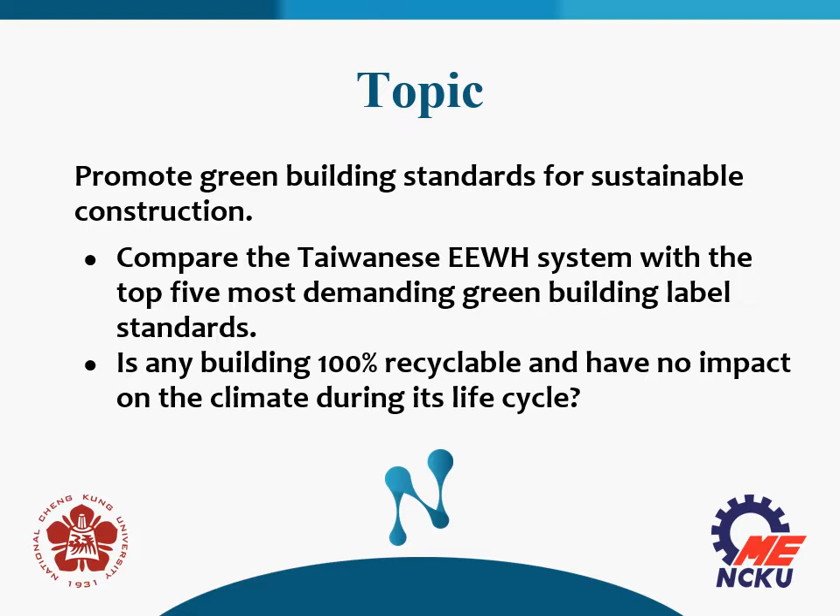This is the outline. Many may consider a green building as a building that comes with green walls and solar panels to beautify and protect the environment. It is way more than that. Green building is a multidisciplinary subject and has a profound impact on us.

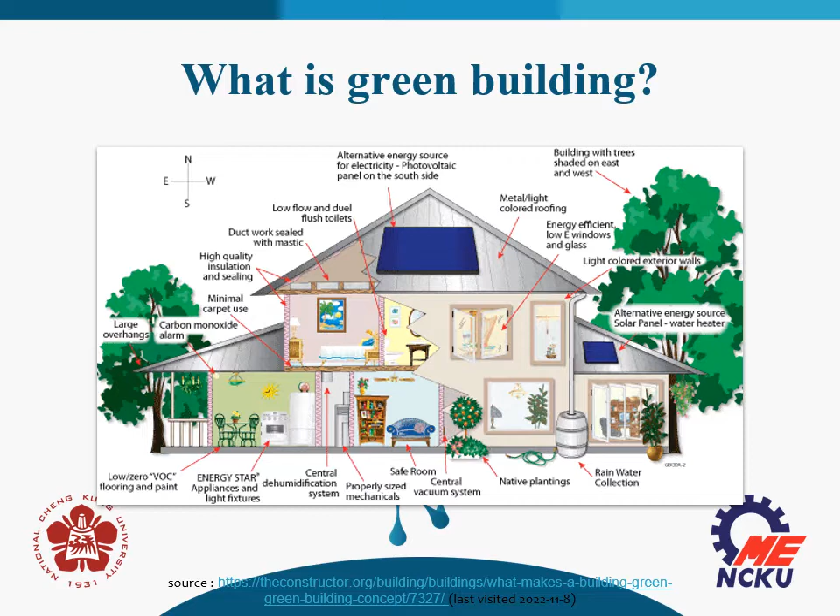Generally speaking, green building reduces the environmental impact of buildings and enhances the health and well-being of building occupants. In order to meet global carbon reduction goals, we need a rapid and far-reaching sustainable transition in land, energy, buildings, transport, and cities. Green buildings are designed to reduce the overall impact of the built environment on human health and the natural environment by efficiently using energy, water, and other resources, protecting occupant health and improving employee productivity, reducing waste, pollution, and environmental degradation.

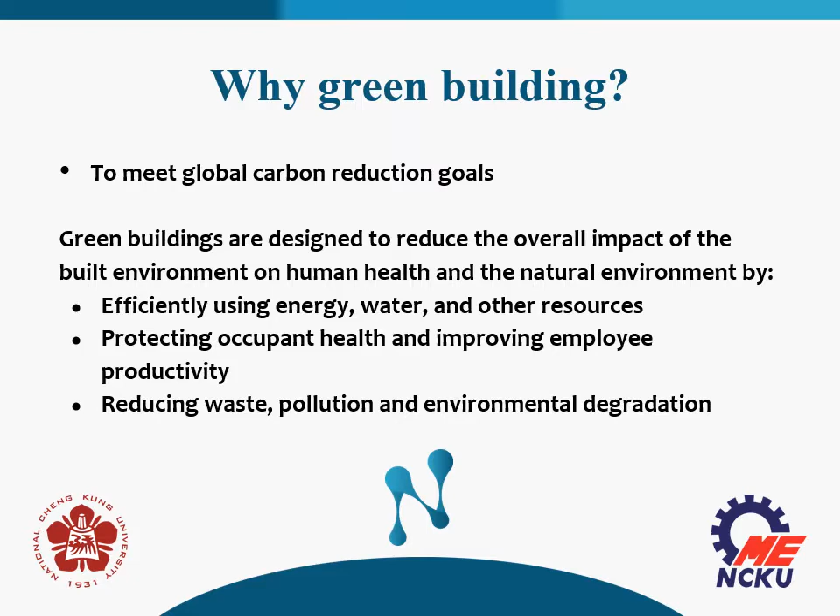Let's start watching the video about exploring green building and the future of construction.

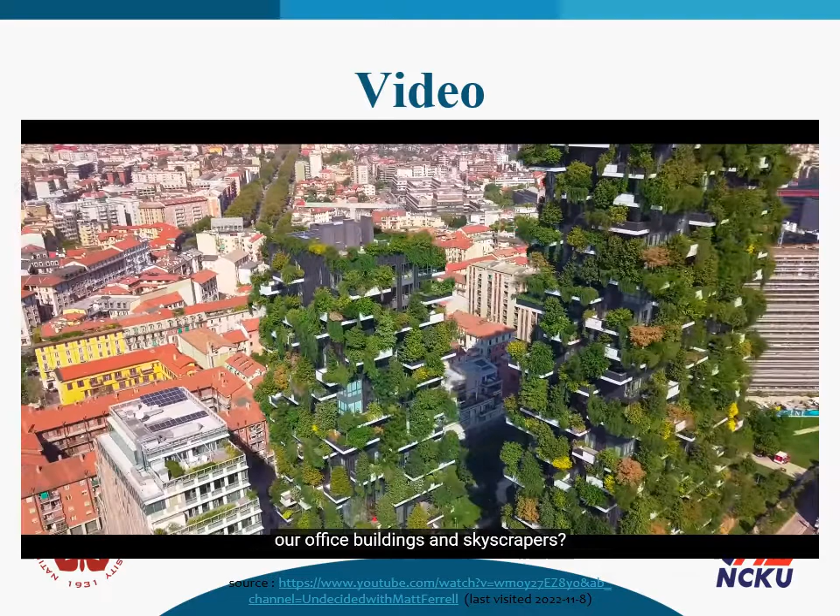A lot of focus is put on generating cleaner energy for a sustainable future, but that's just one piece of the puzzle. What if we could dramatically reduce our energy consumption just by changing the way we build our office buildings and skyscrapers? Imagine a skyscraper with smart windows and walls made from fungus. Yes, fungus. Let's explore green building and the future of construction. And can going net zero really make a difference? I'm Matt Ferrell. Welcome to Undecided.

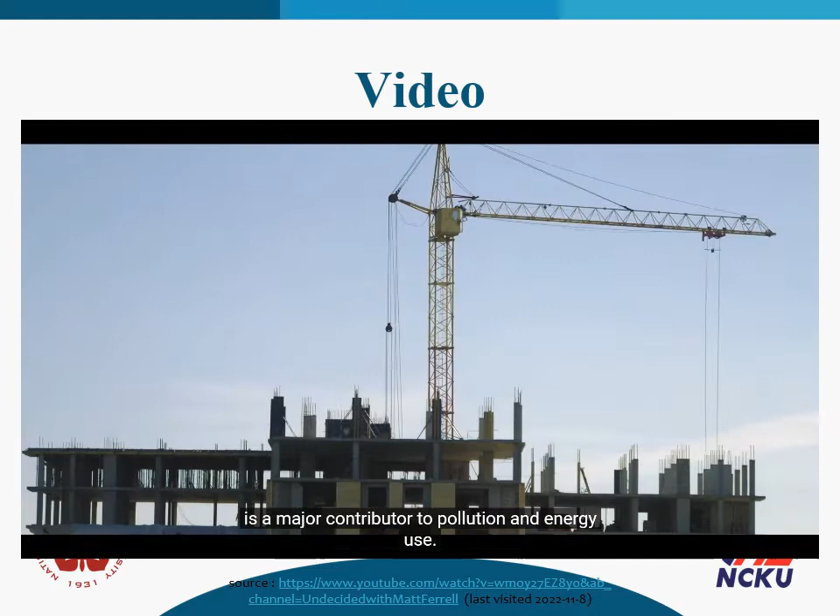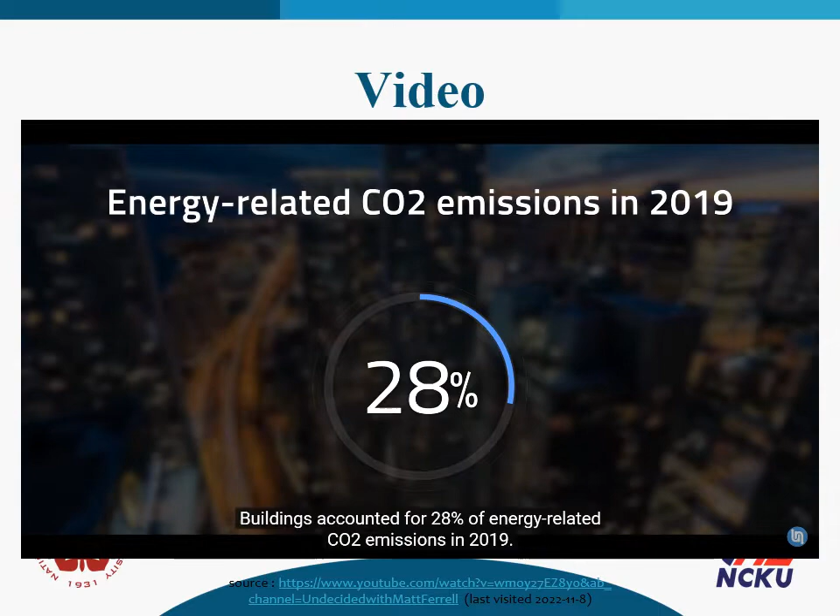Building office buildings and skyscrapers with thousands of pounds of concrete, steel, and other materials is a major contributor to pollution and energy use. But it's more than that. Our homes and office buildings' lighting, heating and cooling, poor insulation, and integration into the surrounding environment have a lasting impact on energy use and costs. They require larger amounts of power and water to keep comfortable, which just keeps going on indefinitely. Buildings accounted for 28% of energy-related CO2 emissions in 2019. In order to reduce that problem, we need some innovations around how we build our houses, offices, and skyscrapers.

And this is where net zero and green buildings come in. These constructions are designed and built with the goal of creating a positive impact on the environment and climate. They can combine energy efficiency and renewable energy to reduce power consumption, benefit the environment, and improve the quality of life for the people that live and work in those buildings. Now, the concept of green building has been scaling from small houses to big offices and skyscrapers around the globe. Some international certifications have been developed in order to provide clear guidelines on how to do it.

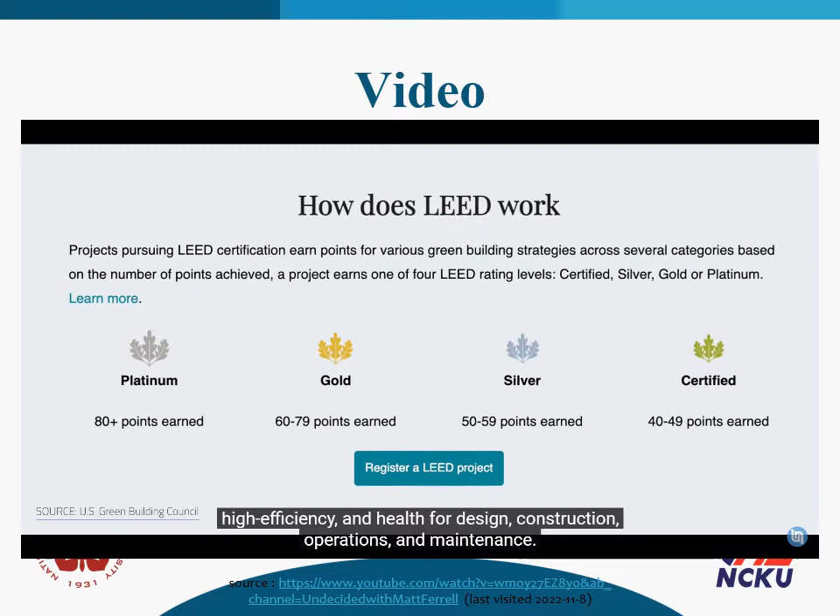The U.S. Green Building Council developed the Leadership in Energy and Environmental Design, also known as LEED, to rate green buildings and provide owners with a framework for cost saving, high efficiency, and health for design, construction, operations, and maintenance. Another popular certification is the Building Research Establishment Environmental Assessment Method from the UK, also known as BREEAM. Or BREEAM? Who comes up with these acronyms?

Well, anyway, zero energy buildings have on-site renewable power sources like solar panels to try to produce as much clean energy as it consumes. You can't always do 100%, but the goal is to get as much as you can. Now, the power generated during the daytime is consumed by the facility itself. And if there's energy surplus, the building delivers that into the grid to try to compensate for grid energy consumption at night. However, to improve efficiency, energy consumption needs to be reduced.

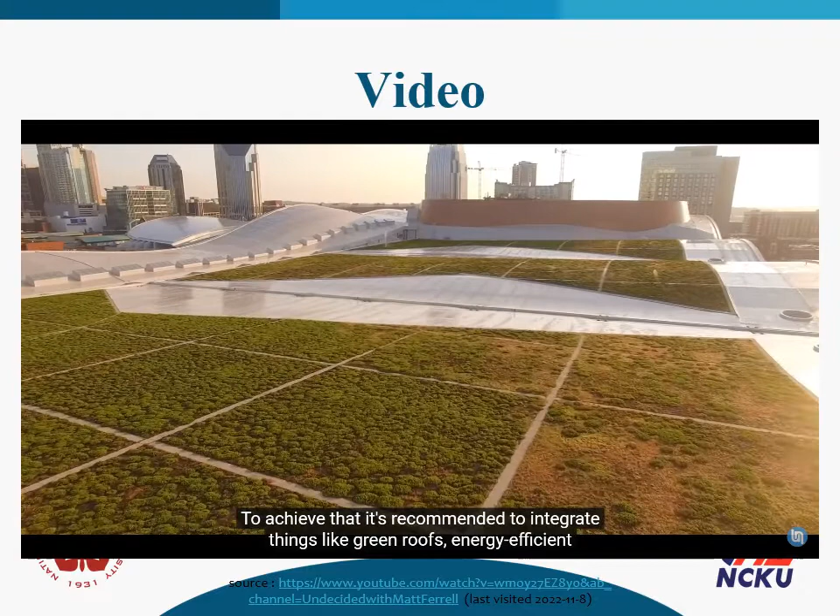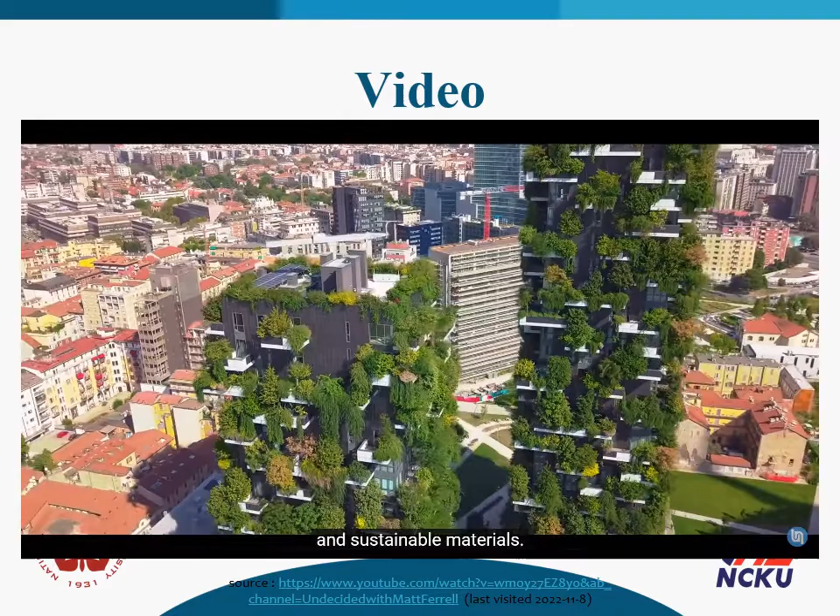So heating and cooling and lighting needs to be minimized. To achieve that, it's recommended to integrate things like green roofs, energy efficient windows with triple pane glass, and good insulation. Now, net zero buildings are also considered green if they're constructed with non-toxic, eco-friendly, and sustainable materials. They should also use less water and have good air quality so it becomes more sustainable.

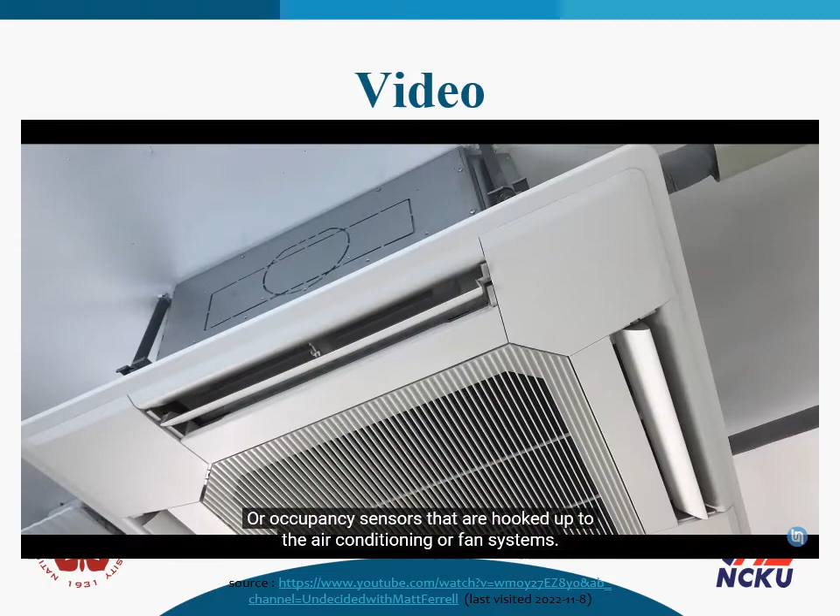Some of the simplest solutions you may have already seen where you work. A good start to making a building more efficient is using high efficiency LED and smart lighting, or occupancy sensors that are hooked up to air conditioning or fan systems. All of those can contribute considerably to reduce energy consumption.

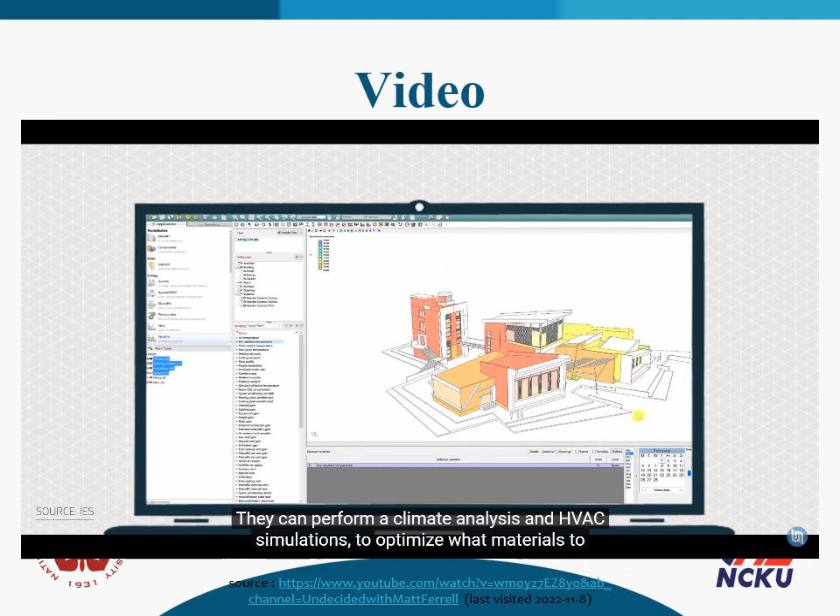But taking things to the next level, engineers and architects can perform advanced analysis through 3D building energy simulation tools to achieve higher efficiencies. Some software like Green Building Studio, Energy Plus, and IES Energy Modeling enable engineers and architects to improve a green building's design in order to increase their sustainability. They can perform a climate analysis and HVAC simulations to optimize what materials to use and how to orient the building for best efficiency. They can see exactly how the building will fare throughout the year before it's even built.

Examples of green and net zero buildings have been spreading worldwide over the past decade. In London, for example, Siemens has built the Crystal, one of the greenest buildings in the world. This highly sustainable building is also a unique events venue.

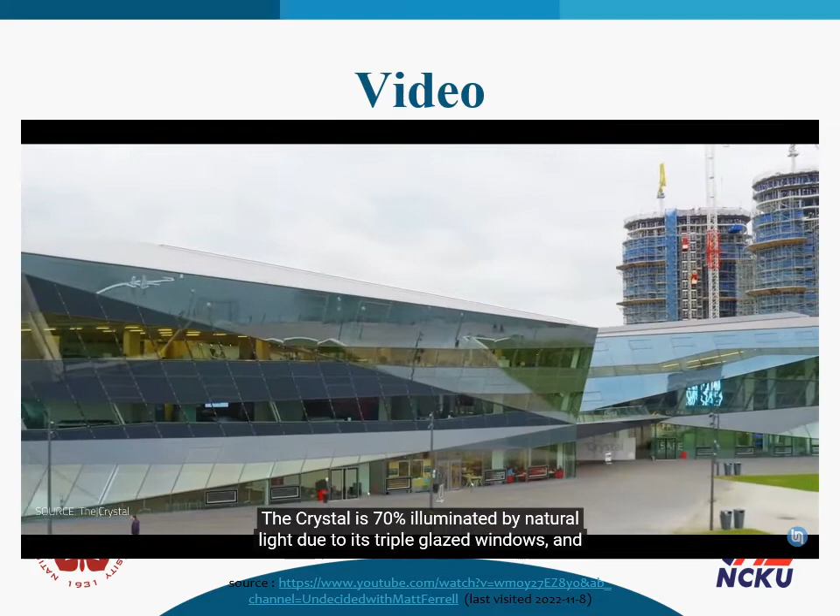It establishes the benchmark for sustainable building design, achieving Platinum LEED and Outstanding BREEAM accreditation, the most rigorous standards for sustainable design. The Crystal is 70% illuminated by natural light due to its triple glazed windows, and the solar panels produce 20% of the electricity that it uses.

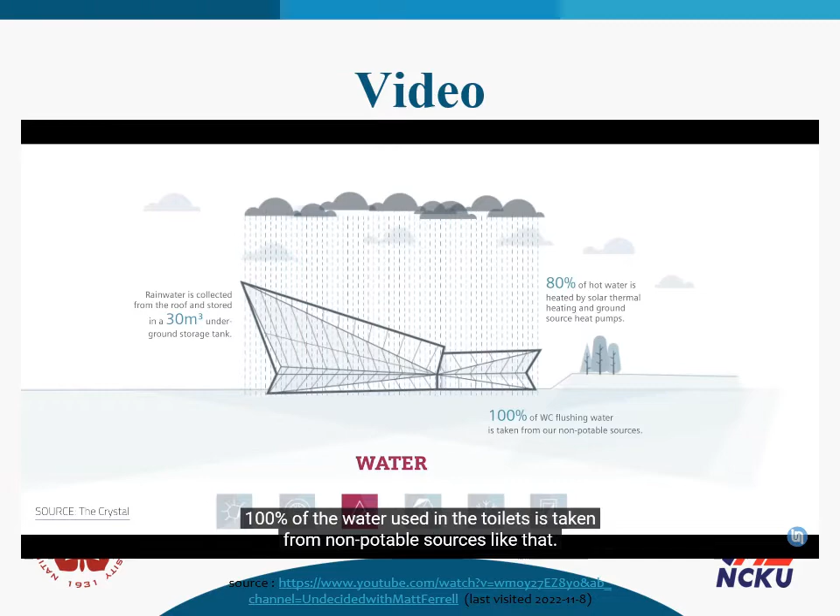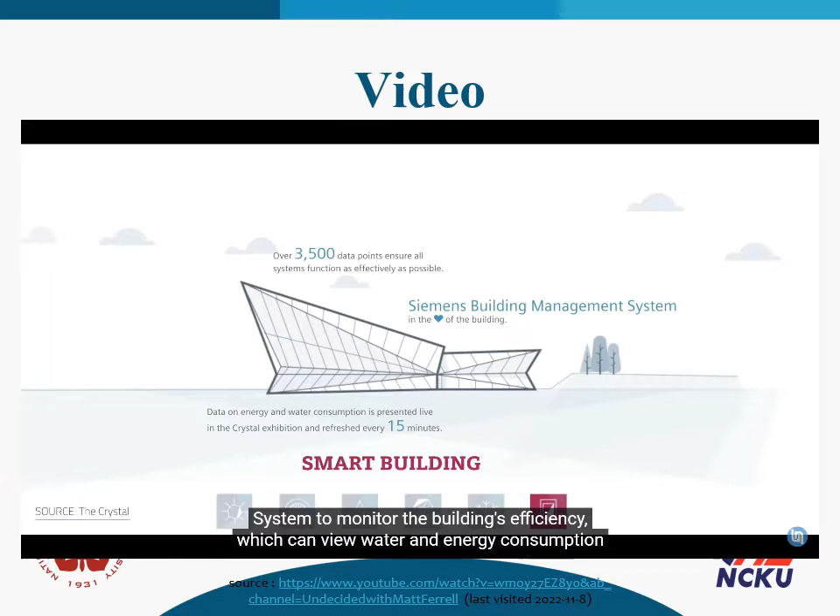Rainwater is collected from the roof and stored in an underground tank for use in the building. 100% of the water used in the toilets is taken from non-potable sources. Another interesting feature is the 3,500 data points used by the Siemens Building Management System to monitor the building's efficiency, which can view water and energy consumption live.

The building cost about £30 million in 2012, but saves a lot of money with electricity. Peter Daw, the city's development manager at Siemens, said: in terms of CO2 savings, we're saving about 71% compared to an equivalent building. In terms of energy costs, we're saving about £500,000 a year.

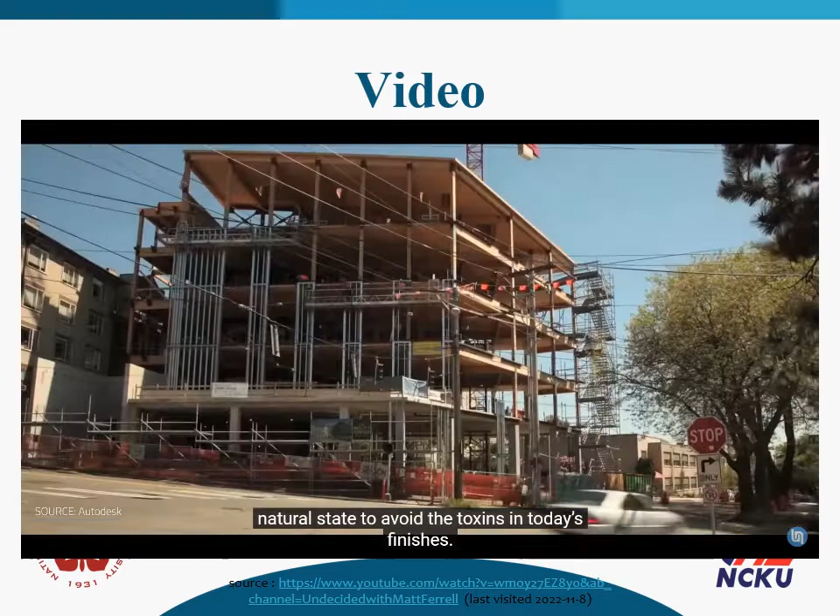In Seattle, the Bullitt Center is considered the greenest commercial building in the world. Its structure is mostly composed of heavy timber, and the materials were kept to their natural state to avoid toxins in today's finishes. The wood was sourced locally.

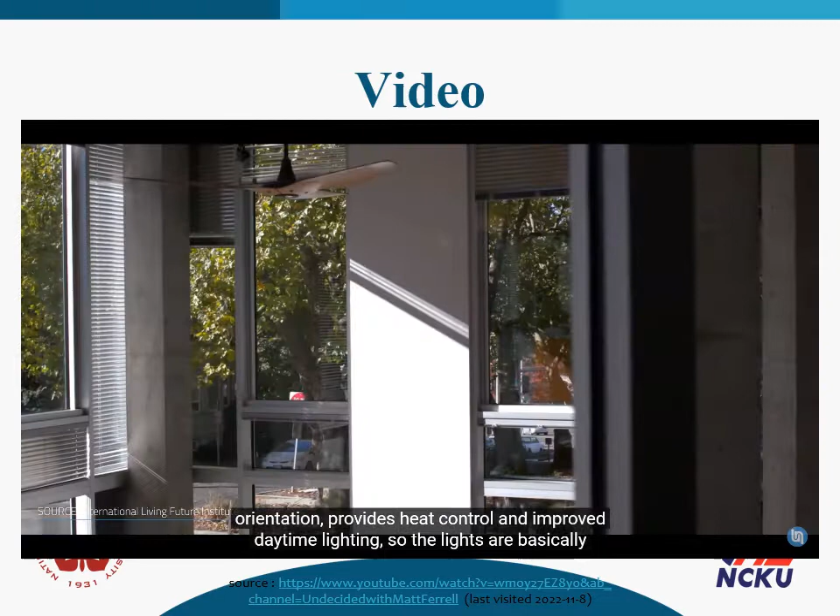The triple glazed curtain wall system, which creates the airtight seal, along with the orientation, provides heat control and improved daytime lighting, so the lights are basically off most of the year. In addition, a closed-loop geothermal system meets the heating and cooling load in the office, and an air-to-air heat exchanger provides incoming fresh air from the outside.

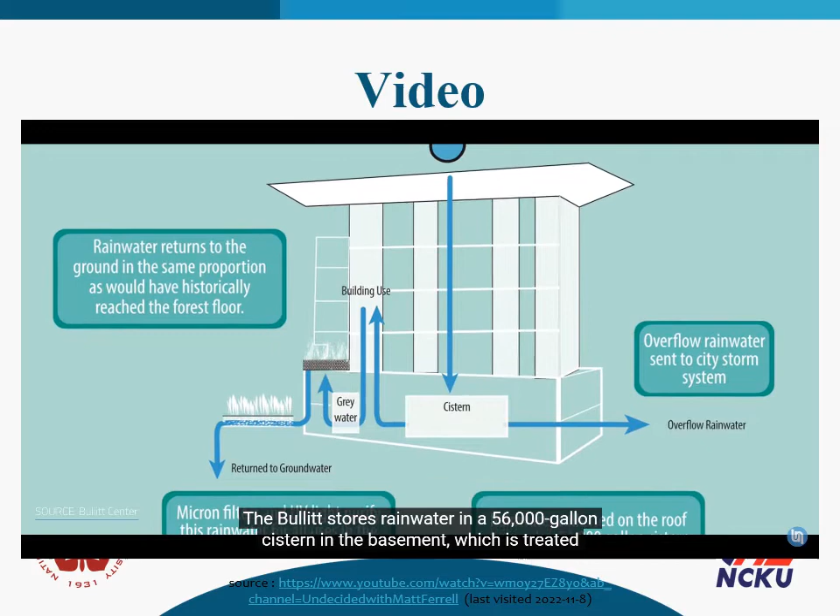The Bullitt stores rainwater in a 56,000-gallon cistern in the basement, which is treated and used for non-potable and potable uses, meaning they can use it for drinking water. According to Justin Stenkamp, a mechanical engineer with the company that designed the building's control and plumbing systems, these measures alone help save approximately 80% of the water use over a regular office building.

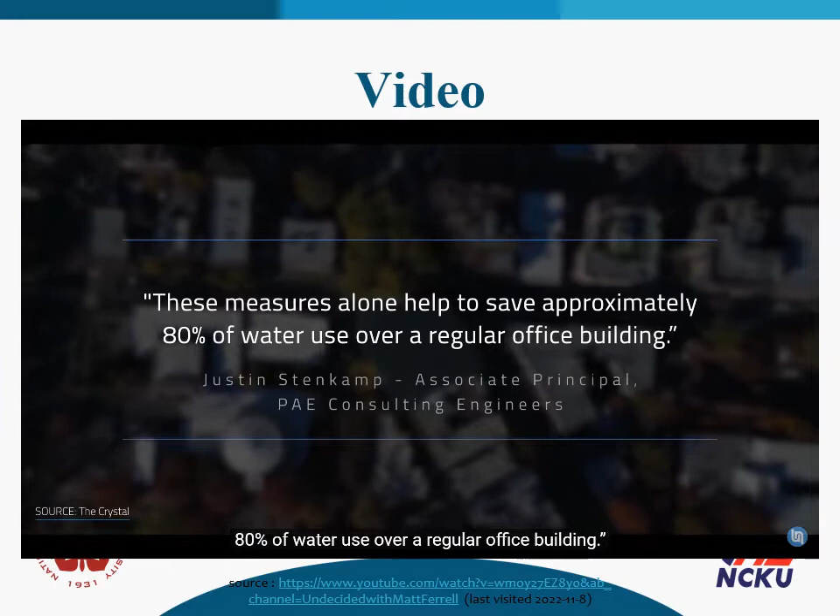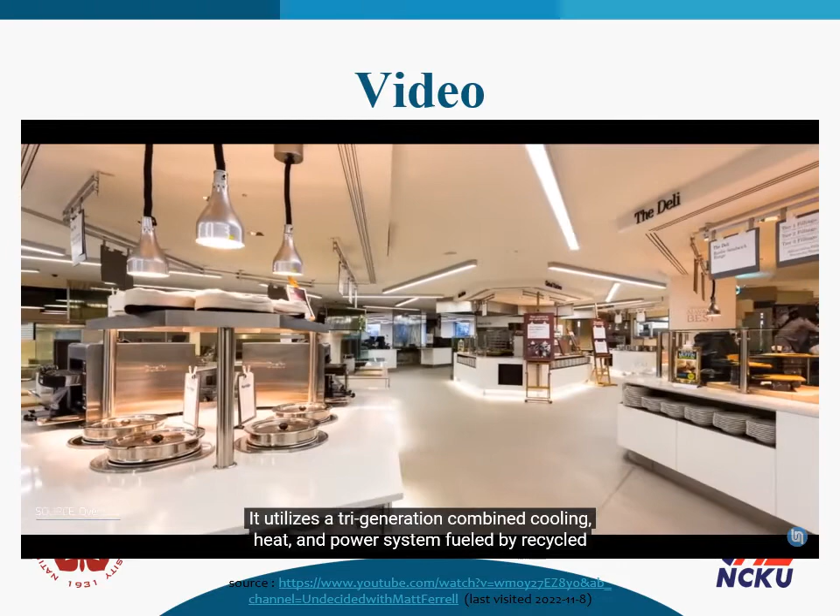All of that is well and good for building new buildings, but what about existing buildings? One Embankment Place was built in the early 1990s in London for PricewaterhouseCoopers. It's a great example of zero-energy retrofitting, and today is one of the greenest buildings in the world. It utilizes a tri-generation combined cooling, heat, and power system that's fueled by recycled waste vegetable oil.

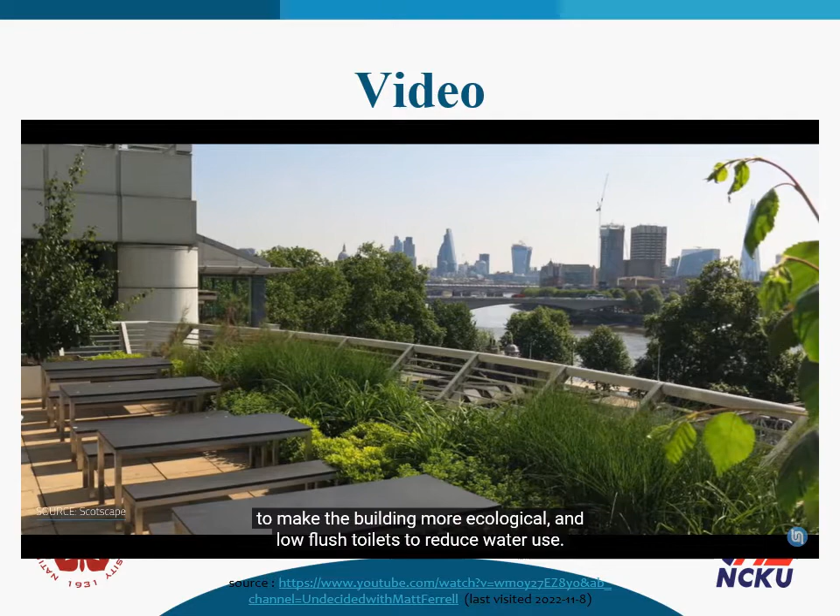It also has several open-plan spaces to harvest daylight, roof gardens and green walls to make the building more ecological, and low-flush toilets to reduce water use. Currently, One Embankment Place emits 40% less carbon than a typical building of its size, and 20% of its heat and 60% of its energy needs are produced on-site. PricewaterhouseCoopers has saved £14 million in energy and carbon-related costs.

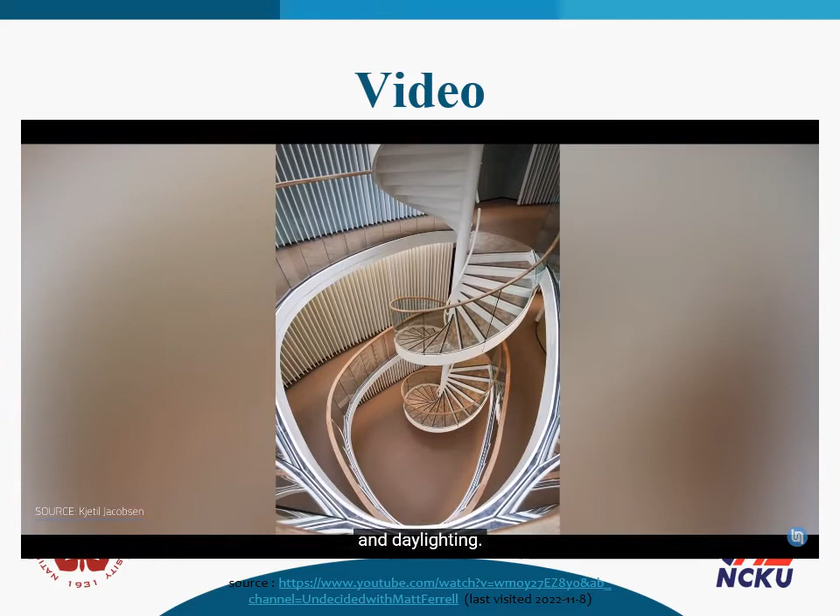Another retrofitting example is Powerhouse Kjørbo, located in Bærum, Norway. I hope I didn't butcher that pronunciation, because I most likely did. These two office buildings from the 80s were retrofitted with efficient ventilation, insulation, and daylight. In addition to producing renewable energy on site, the energy needs of the buildings have been reduced by more than 86%. As a result, Powerhouse Kjørbo received an outstanding classification from BREEAM NOR.

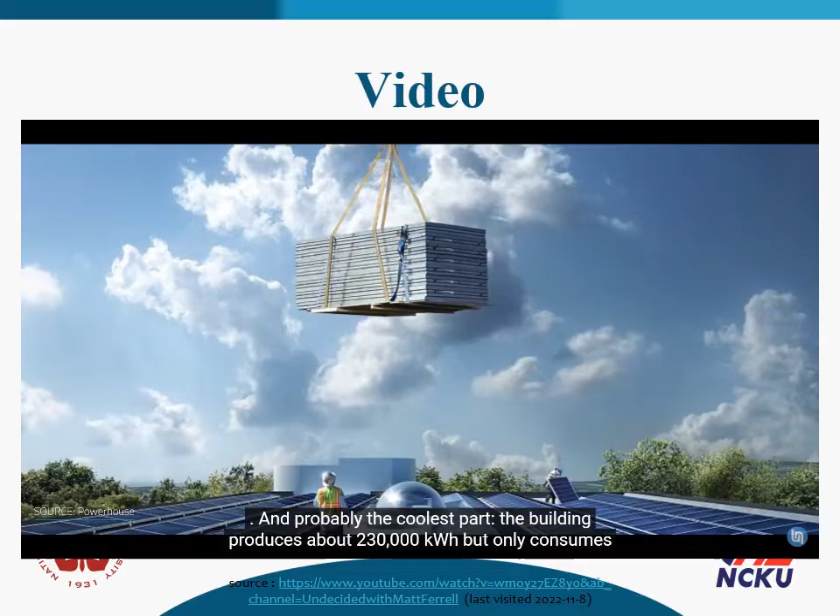And probably the coolest part, the building produces about 230,000 kilowatt hours of energy, but only consumes about 100,000 kilowatt hours. With new buildings and retrofitting old buildings, what's the forecast of net zero adoption?

According to one report, the global net zero energy building market share was valued at $896 million in 2018. It's expected to reach $2.1 billion by 2024. That's some serious growth that's being spurred on by not only policy, but the value that it drives for building owners.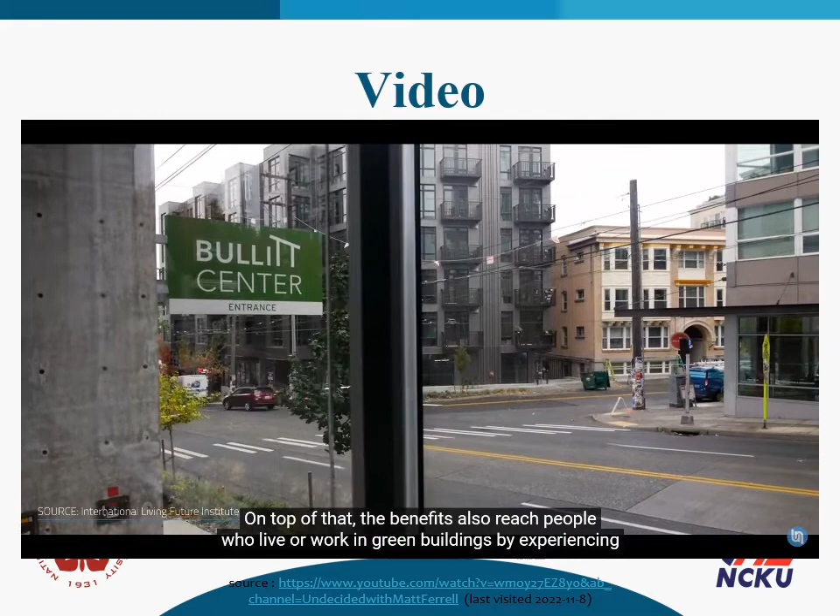Besides reducing utility bills and zeroing out energy use, it can increase the building's valuation and insulate owners from future energy price variation. On top of that, the benefits also reach out to the people who live and work in the green buildings by experiencing fresh air and enjoying an environment more connected to nature. And there's the positive impact on the environment due to water conservation and energy and material efficiency.

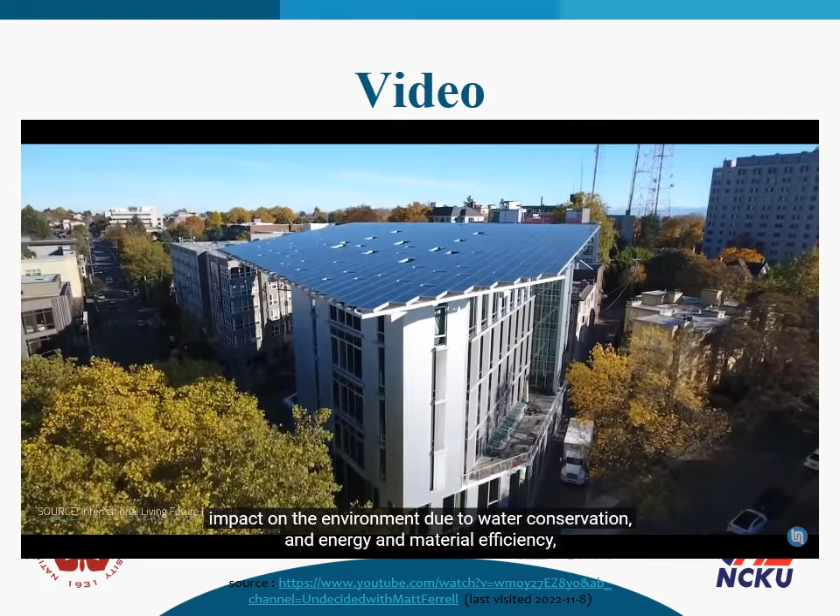So if this is all so great, why is it still a bit unusual to see a green or net zero energy office building? I worked in one for years here in Boston, but they're still hard to come by.

The cost of building a zero energy building is higher than constructing a common one because the building materials are usually more expensive. And there still isn't a vast number of designers or builders that are highly skilled and experienced in this type of building.

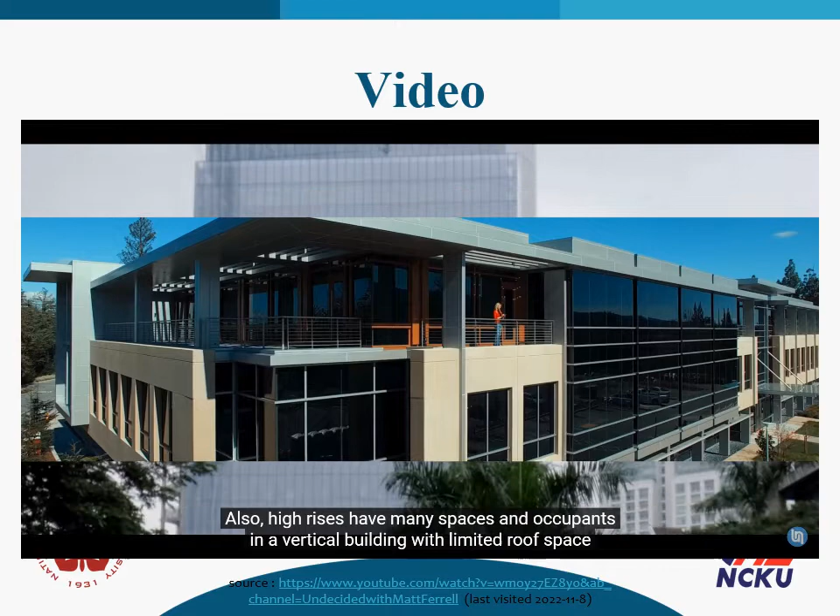Also, high-rises have many spaces and occupants in a vertical building with limited roof space for solar panels, so it's difficult for all of them to produce the energy that they consume.

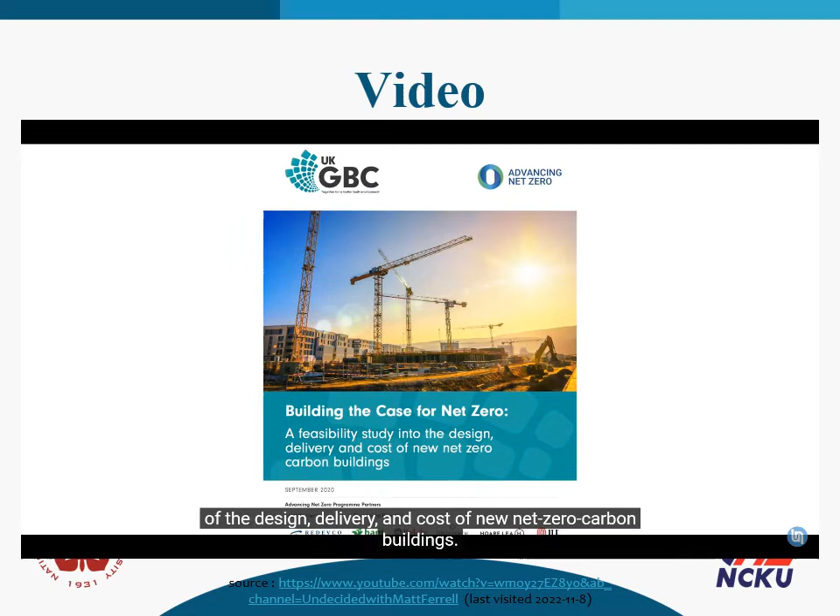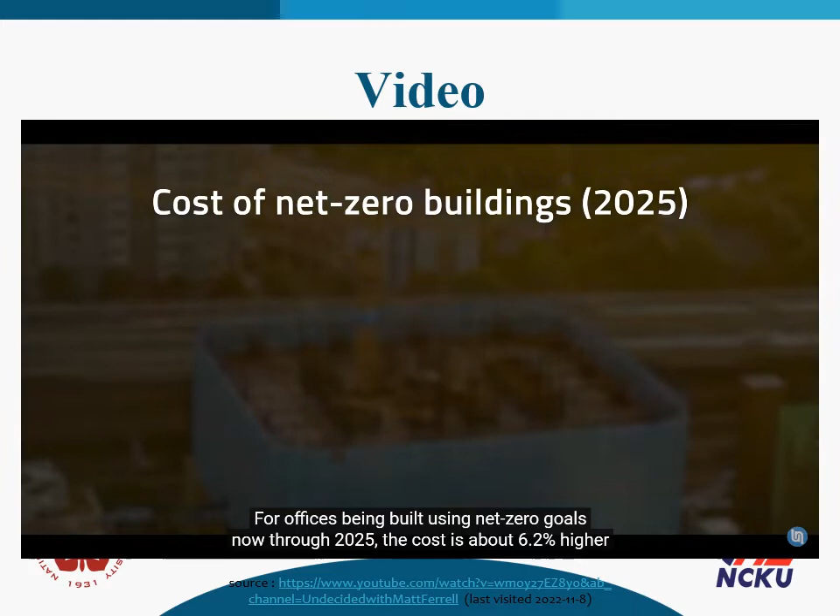A study conducted by the United Kingdom Green Building Council analyzed the feasibility of the design, delivery, and cost of new net zero carbon buildings. In the study, they broke it down into two buckets. For office buildings being built using net zero goals now through 2025, the cost is about 6.2% higher than standard. Looking further out at newer technologies and standards expected to be the norm by 2030, the cost is 8 to 17% higher than standard.

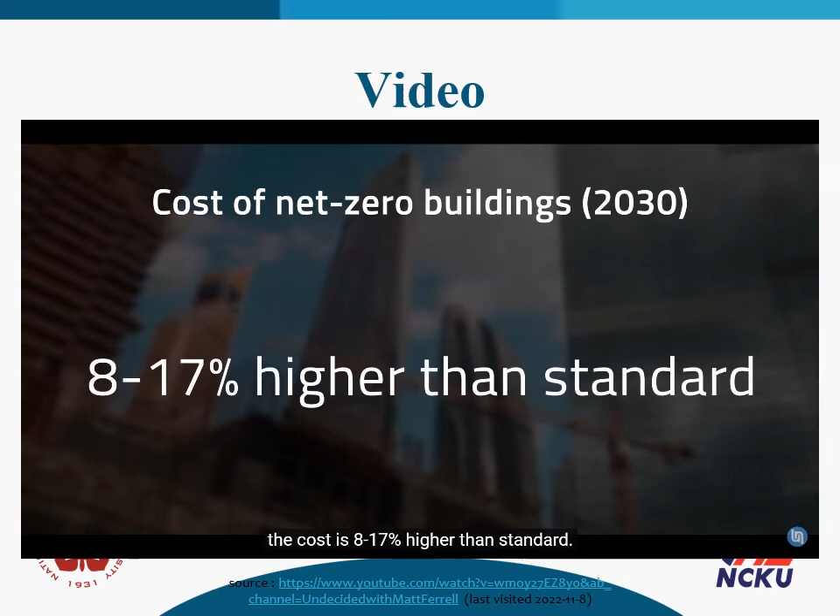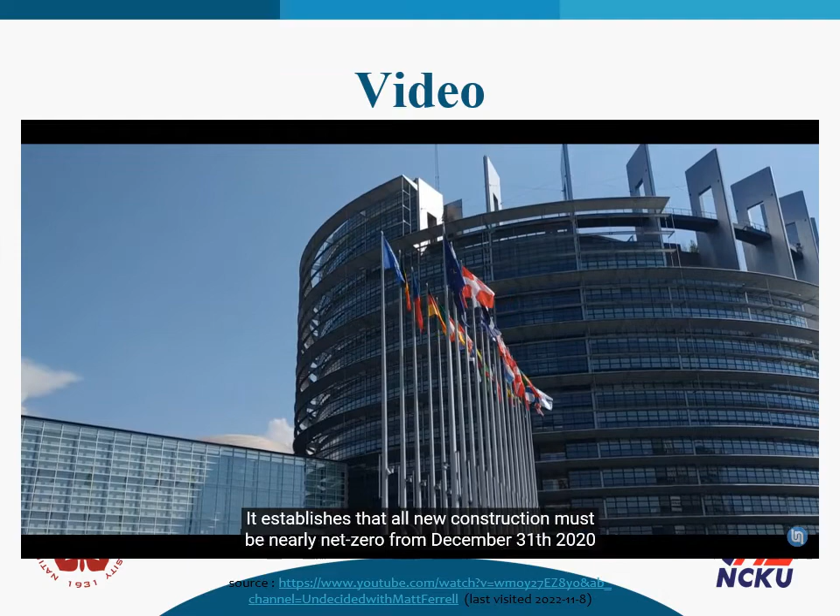Now, some governments are rolling out policies to stimulate net zero or nearly net zero energy buildings. The EU's Energy Performance of Buildings Directive is a really good example. It established that all new construction must be nearly net zero from December 31st, 2020, so everything from now onwards needs to meet that criteria. Energy performance certificates must be issued when construction is rented or sold, and promote smart technologies like building automation and control systems.

Then there's the World Green Building Council, a group of 70 green building councils from around the world, who have, among other initiatives, the Net Zero Carbon Buildings Commitment. This challenges organizations, businesses, cities, states, and regions to make assets under their direct control operate at zero carbon by 2030. There are currently 94 businesses and organizations, 28 cities, and 6 states and regions participating, covering nearly 6,000 assets. By sharing knowledge and lessons learned, the initiative aims to remove barriers to net zero implementation and inspire others to take action.

In addition to green policies, let's move back to the topic: compare the Taiwanese EEWH system with the top 5 most demanding green building label standards.

This is a table of the EEWH Green Building Evaluation System of Taiwan. The minimum requirement for green building certification is to pass 4 indicators, including 2 prerequisites: daily energy conservation and water conservation, and 2 optional indicators from among the other 7. A green building is estimated, over an average lifespan of 40 years, to save 20% in electricity and 30% in water, reduce resource consumption, and provide a better living environment with health and amenity. The label is valid for 3 years and is renewable.

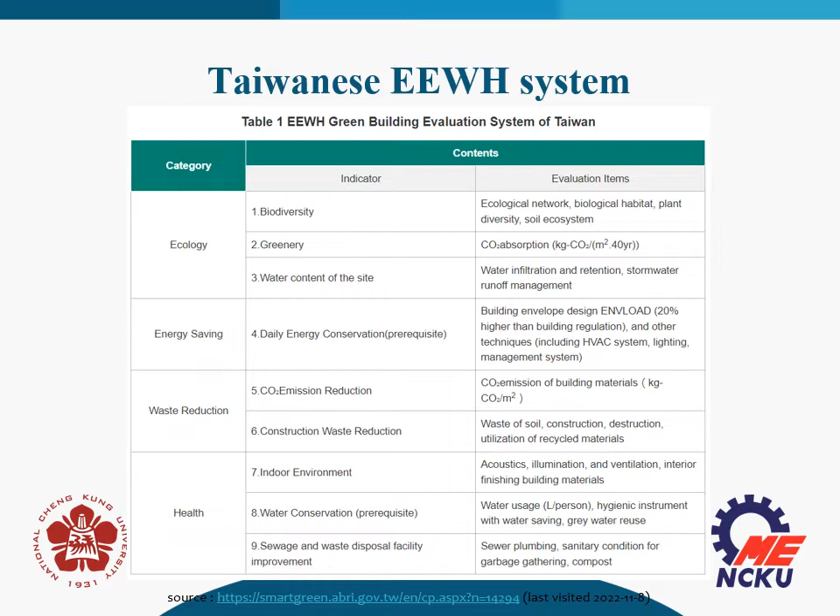By the end of December 2021, a total of 10,296 buildings or projects in Taiwan were certified as green buildings.

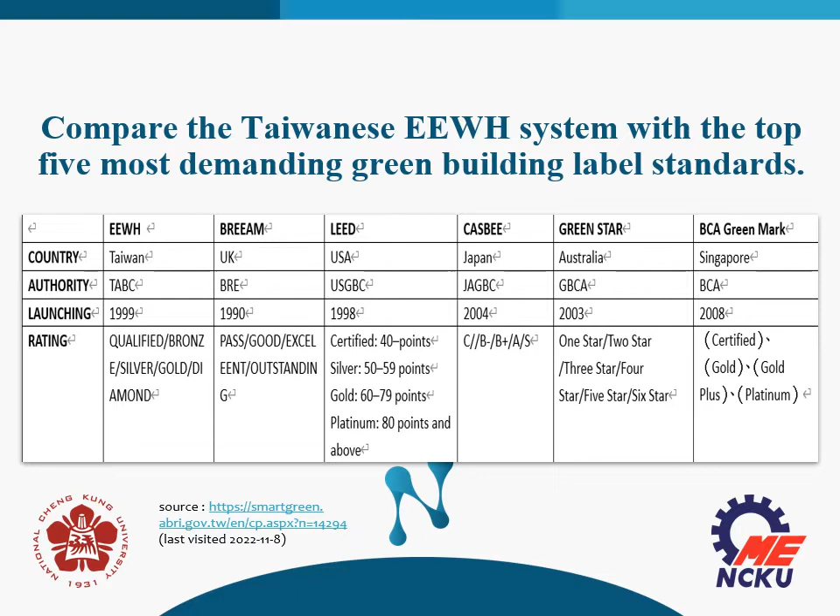The following table and the expanded information directly below it outlines several of the most commonly used and respected green building rating and certification systems in the Taiwanese marketplace. The following pictures visualize the table: their countries, authorities, year of launching, and levels of classification. Each of the standards has its own manual with large amounts of technical details, the distribution of credits between the categories, and details regarding the assessment. The technical details are divided into 5 to 10 categories, each with mandatory requirements that have to be fulfilled in order to obtain the final certification.

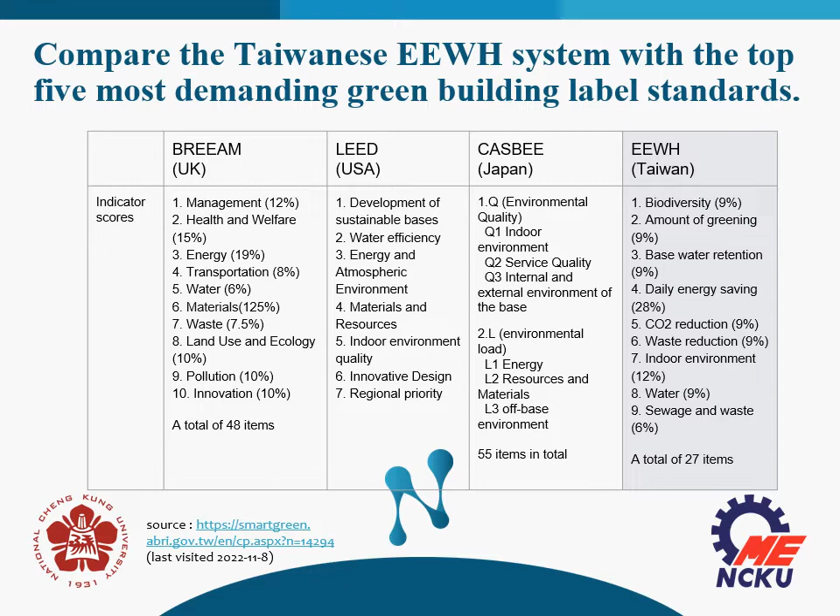Is any building 100% recyclable and has no impact on the climate during its life cycle? The answer is yes. Primitive houses are almost 100% recyclable buildings. For example, houses built of wood, clay, straw, mud, ice, rock, and so on. The left-hand corner is a primitive medieval clay house with a straw roof. The right-hand corner is an igloo, located in Canada and Greenland.

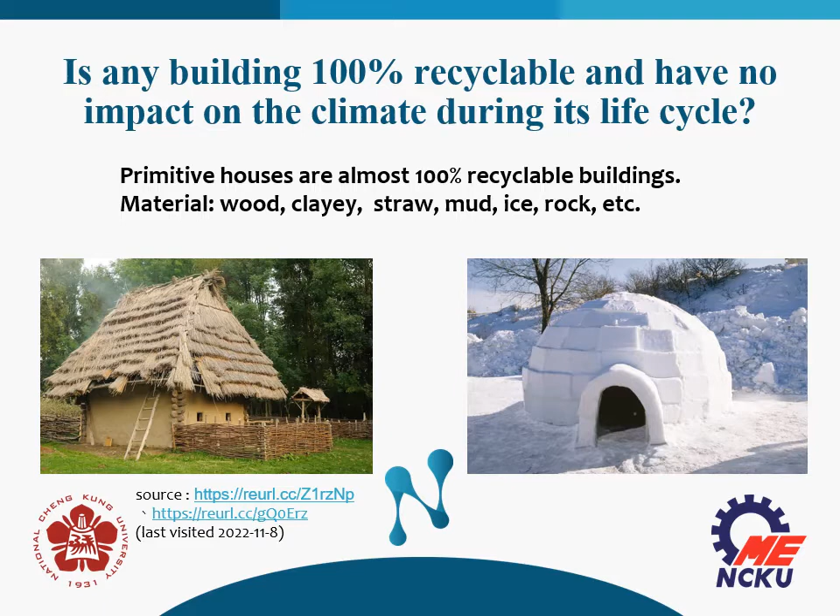Increasingly, we have approaches that can offer highly recyclable construction. However, designing a completely recyclable building is still a mission impossible. Norwegian startup Othalo developed a patent-pending technology to manufacture building systems using recycled plastic waste. Their target market is affordable housing, refugee shelters, and camps for disaster and emergency situations. For a 60 square meter house, Othalo recycles 8 tons of plastic waste. With today's amount of plastic waste, 1 billion houses can be built. The aim is to use local raw materials and create jobs in the process.

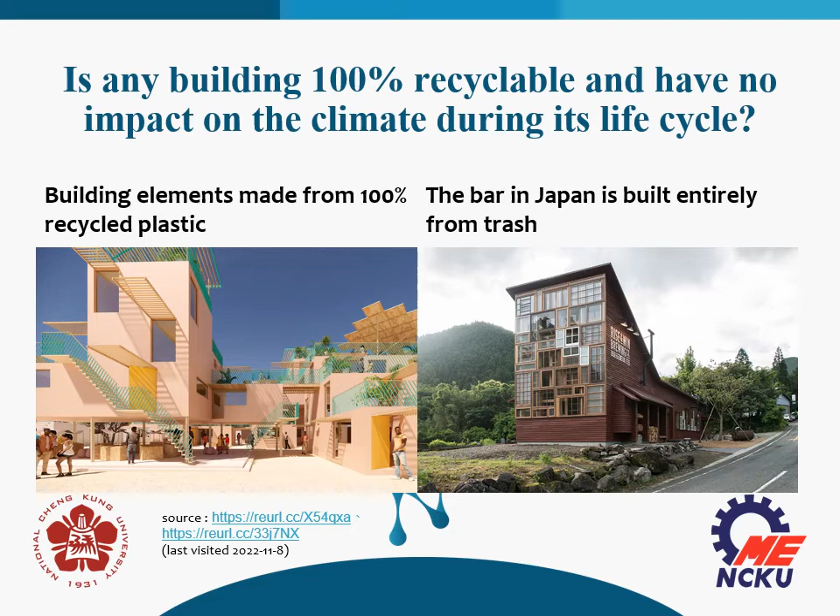This bar in Japan is built entirely from trash, executed with a zero-waste goal. The house was built using windows salvaged from abandoned homes, reclaimed floor tiles, old bottles for chandeliers, and newspapers for new wallpaper.

These are our opposite views. Firstly, high initial investment. Although the returns are great over time, the initial investment is still a major problem in green buildings, which can be more expensive than conventional buildings. Depending on the number of eco-friendly technologies you want to implement, the cost may even be higher, and several people cannot afford the initial cost of construction.

Secondly, restriction of location. Figuring out the right location is another disadvantage of green buildings. There are many factors that may affect green buildings, such as climate change. The buildings utilize mainly sunlight to regenerate power, so building in a region with many sunny days is crucial.

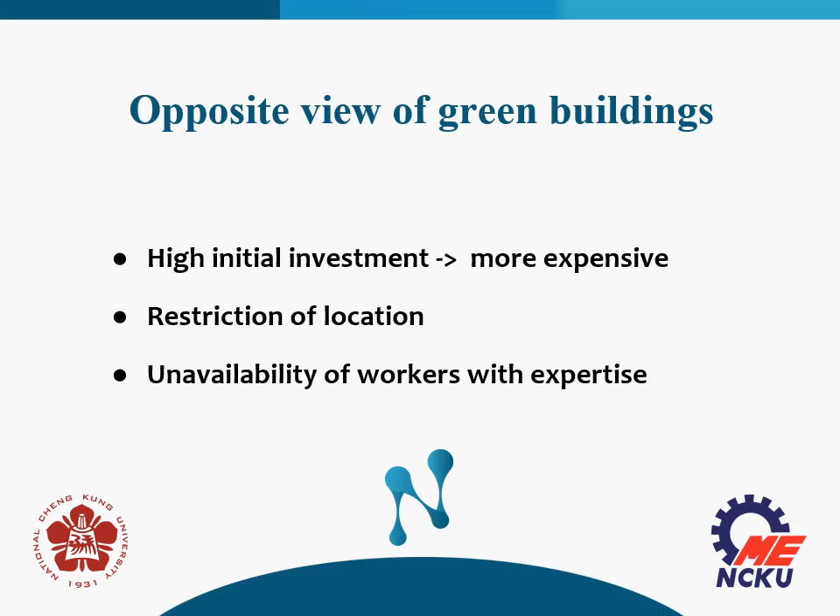Thirdly, unavailability of workers with expertise. It might also be challenging to find workers with expertise both for initially constructing the buildings and repairing them, because industries like these are relatively new.

These are 3 action ideas suitable for inducing change. Firstly, government subsidies and incentive policies for constructing green buildings, also requiring builders to propose long-term maintenance plans. Secondly, growing public awareness of environmental protection in the world. Thirdly, converting old houses into green buildings is more environmentally friendly than demolishing them.